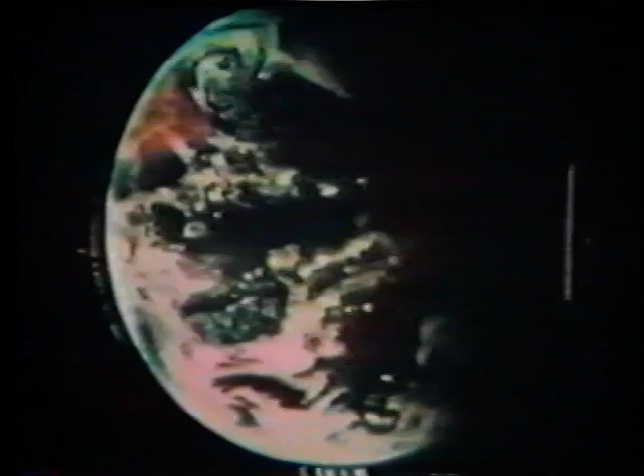Except for scientists who study it or environmentalists concerned about its quality, most people give little thought to the air which surrounds them. But if you're counting on it supporting you immediately after rotation from the runway, you should reacquaint yourself with it. Almost everyone remembers that dry air is 78% nitrogen, 21% oxygen, and 1% other gases. The ratio of these gases remain the same around the world and as high as the atmosphere extends.

Water vapor is also a gas found in the atmosphere. Its quantity may vary, unlike the other gases whose ratio is pretty well constant. It may make up from near 0% of the atmosphere to a maximum of about 5%. As the amount of water vapor increases at a given point, all other gases are reduced proportionately. When water vapor is absorbed by the atmosphere, it reduces the molecular weight of the air. It makes the air thinner, so to speak, because a molecule of water vapor is actually lighter than a molecule of air. It seldom affects aircraft operation by itself.

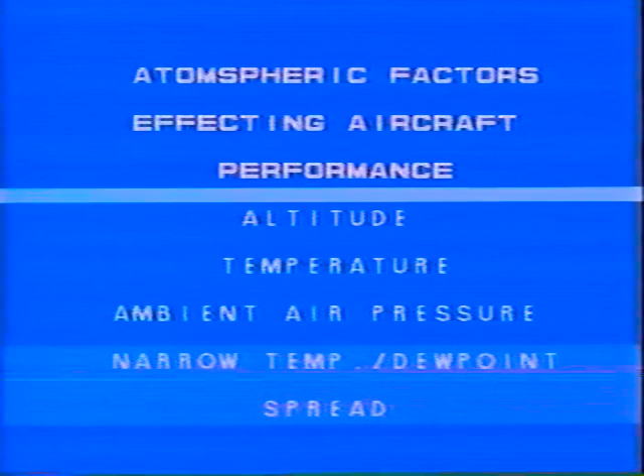Most of us probably know that air is a gas and as such has all the properties of gases. It has mass and weight. It can exert pressure, be compressed or diffused, causing changes in its density. And it can flow as a liquid. It offers resistance to objects moving through it. All of these properties are at work when you fly your plane through the atmosphere.

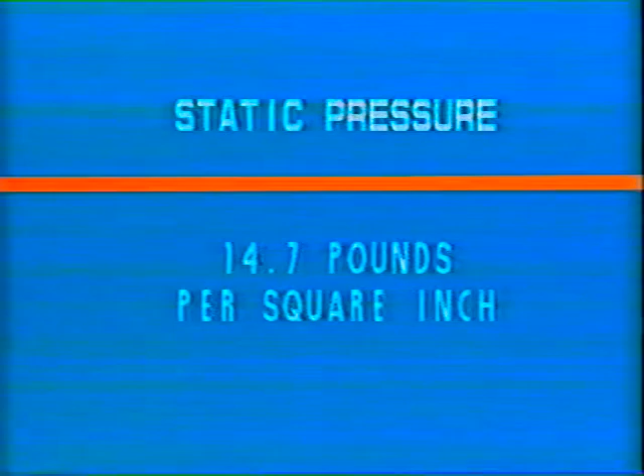Let's first look at the words static pressure. Remember the 14.7 pounds per square inch you learned in junior high school science? That was supposed to be the normal air pressure, that is static pressure. You probably remember a specific number without any qualifications. However, the figure is an arbitrary one and only pertains to sea level on a, quote, standard day, unquote.

If you went to school in North Platte, Nebraska, the figure that you learned as normal air pressure was about 1.5 pounds per square inch off. Air pressure on a standard day in North Platte is more like 13.2 pounds per square inch.

Static pressure, then, is the force exerted by the weight of the atmosphere pressing down from hundreds of miles in space. It is pressing down because it has mass and is reacting to the pull of gravity. If that is so, why isn't the pressure equal regardless of the altitude? Why does North Platte, at a little over 2,800 feet, have over a pound of pressure less than at sea level? One of the other properties of air helps us to explain it.

Compressibility was mentioned earlier. The more weight exerted upon a gas, the more dense it becomes. A column of air one foot square, extending out to the limit of the atmosphere, weighs a little over a ton at sea level on a standard day. For each minute measurement upward, away from the Earth, there is less weight pressing down. This means that the atmosphere at that point is a little less dense.

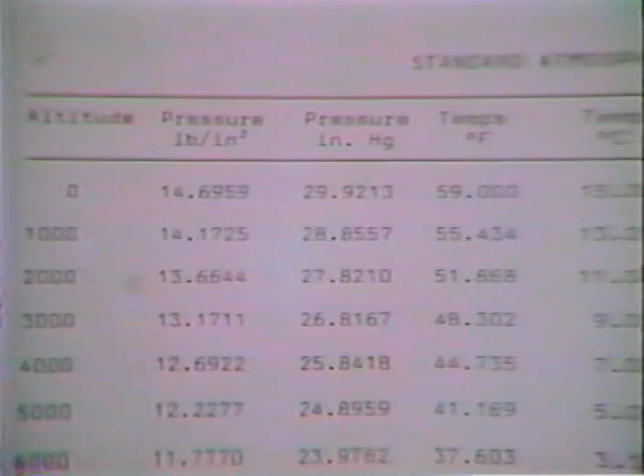Let's take a look at a chart which represents a standard day, one of those we mentioned earlier. This illustration is an excerpt and not the complete chart, which was originally put together by the National Advisory Committee for Aeronautics, the predecessor to NASA. The chart is based on many years of weather observations, and since it was published, has been confirmed as basically accurate. Its purpose is to provide a common denominator for the measurement of aircraft performance and to provide a standard upon which to calibrate and correct the readings of some aircraft instruments. The chart will be important when we discuss aircraft performance and in other presentations dealing with instruments.

Before dealing specifically with any one of them, let's take a moment to review the four forces acting on an airplane in flight. You know them as thrust, drag, lift, and weight, or gravity as some prefer to call it. The two forces which are constantly trying to bring you to a stop on the ground are drag and gravity. The two forces which you must produce to overcome these negative forces are thrust and lift.

Thrust must be able to overcome drag, and lift must be able to overcome gravity before the plane can get off the ground. In a stabilized flight condition, such as level flight, climb, or descent at a constant velocity, thrust and drag are equal, and lift and weight are equal. The propeller is producing a given thrust, but the total drag equals that thrust and limits the speed of the aircraft. The weight of the plane, plus a little extra aerodynamic weight, is equaled by the lift produced over the wings. In aerodynamics, this stable condition is known as equilibrium.

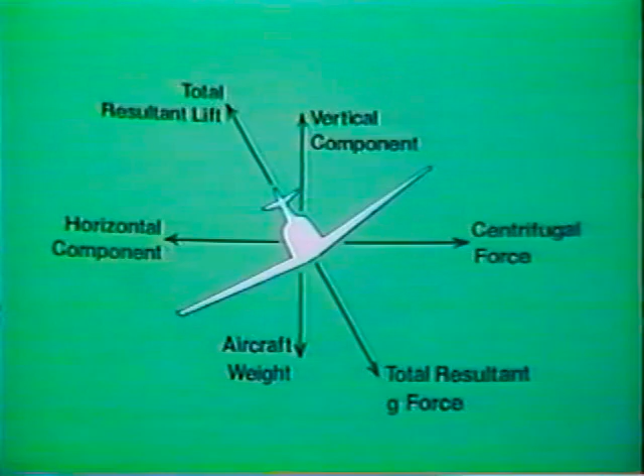Now we come to the big question. What is lift, and how is it produced? Before we get the answer, let's look at some pictures and review some more terms.

An airfoil is any part of the plane shaped so that it responds to air movement by producing differential pressure on either side of the airfoil. The wing, propeller, and empennage are the important airfoils.

Leading and trailing edges of the wings seem to be pretty obvious, but they do more than just outline the silhouette of a wing. Their location has much to do with the aerodynamics of an airfoil. A line connecting the leading and trailing edges of an airfoil is referred to as the chord line.

It should not be thought of as being a permanently anchored thing, since it moves as the high-lift devices change the shape of the wings. Its position in relation to the relative wind and the longitudinal axis of the aircraft are extremely important.

Camber means curving or bending. On an airplane, it refers to the curving surfaces. A wing which has identical curvature top and bottom is known as a symmetrical wing. An asymmetrical wing usually has a flatter lower surface with more curvature on top.

Relative wind is the airstream created by the movement of the plane through the air. Most of the time, its direction is opposite the flight path of the aircraft, but it may be deflected by gustiness or wind shear. Angle of attack is the angle between the relative wind and the chord line of an airfoil. Increasing the angle of attack will increase lift and also drag.

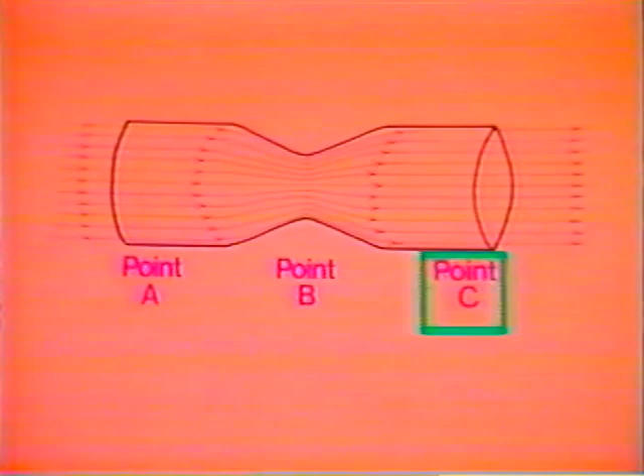After the airflow passes the restriction at point B, its velocity decreases and the pressure increases. If the velocity at point A and C are the same, then the pressure would be identical.

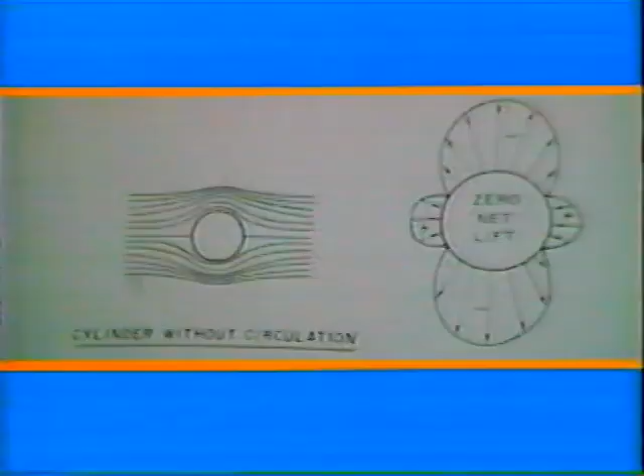Another important concept in the generation of lift is circulation. If you are a baseball fan, you probably have seen its effect on a pitched fastball. Look at this diagram of a cylinder and an airflow. We will ignore density and viscosity at this point.

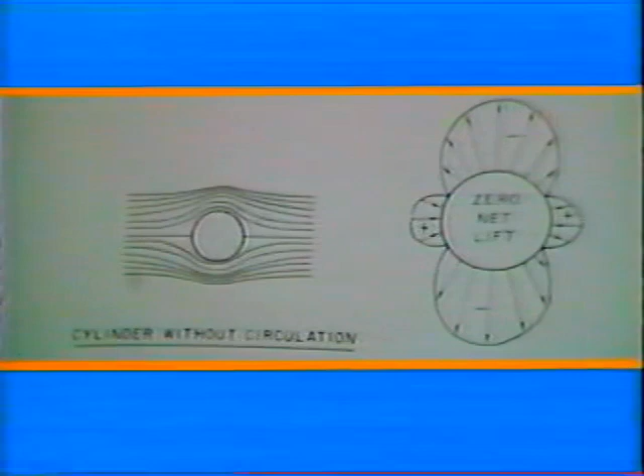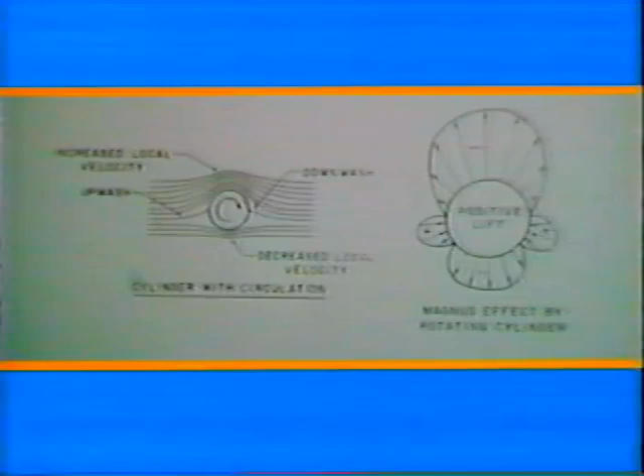Note the pattern first where the cylinder is stationary, and in the second illustration where the cylinder is rotating. The circulation of the cylinder has produced not only a larger amount of lift on its top side, but it has also produced an upwash ahead of the cylinder and has moved the stagnation points toward the bottom.

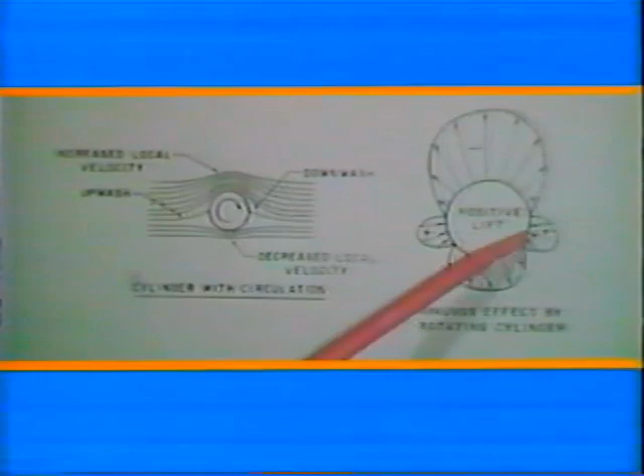There are normally two stagnation points on an airfoil. They occur along the leading and trailing edges of an object placed into an airstream.

At the leading edge, where the air separates to go either above or below, a small area exists where there is no air movement. At this point, a stagnation pressure develops.

This is the sum of the ambient pressure ahead of the wing and the dynamic pressure around the wing. A similar area occurs along the trailing edge of the airfoil.

Apply this concept to baseball. The pitcher puts some backspin on the ball as he throws. The highest velocity exists over the top of the ball, creating lower pressure there than on the bottom.

This lifts the ball. It actually bobs up from the plane in which it was thrown. And if it's a good fastball, the batter will undercut it completely.

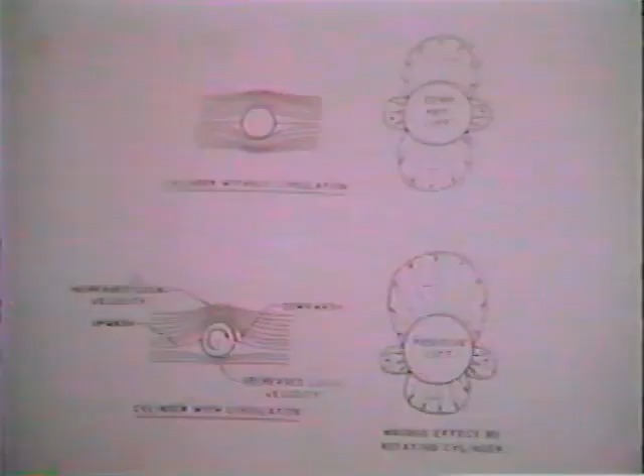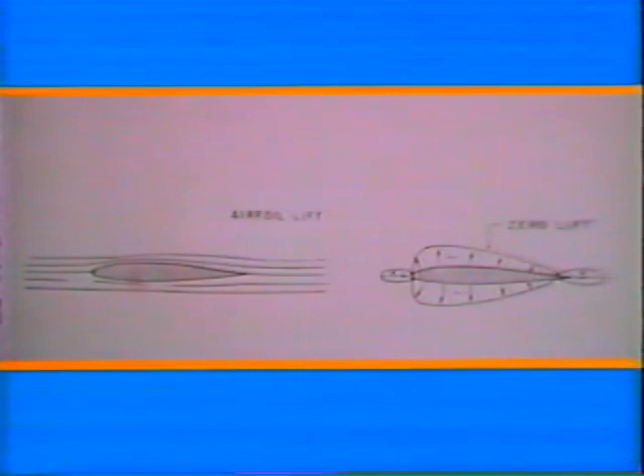Back to airplanes. Compare the cylinder diagrams with two diagrams of a symmetrical airfoil. Note how similar the illustration of the airfoil at zero angle of attack is with the non-rotating cylinder. There are stagnation points fore and aft, and reduced pressure is equal top and bottom.

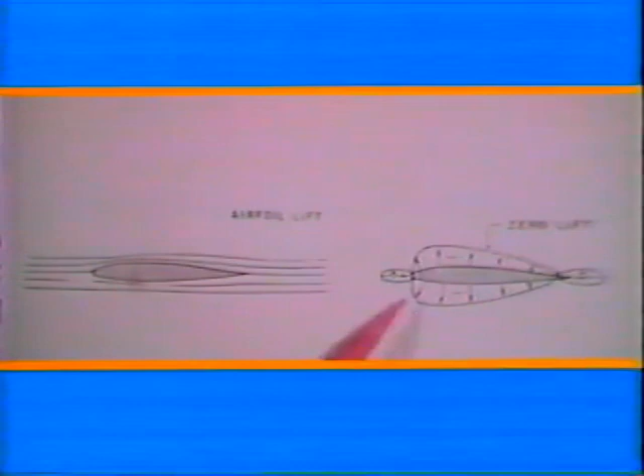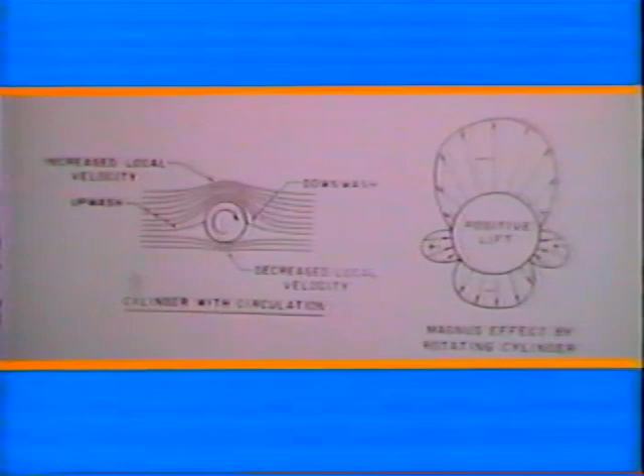Now look at the diagram where the cylinder has been placed in rotation. Lift forces on the top, where velocity is greatest, has increased, while the opposite is true on the bottom. The stagnation points have moved to a lower position. The net result is a positive force acting perpendicular and upward from the cylinder.

The position of stagnation points is of additional importance to you. It is the leading edge stagnation point that has the area where ice formations start. Because of the stagnant air at this point, the ice sometimes develops almost a horn shape, which continues to build out beyond the stagnation area under some circumstances.

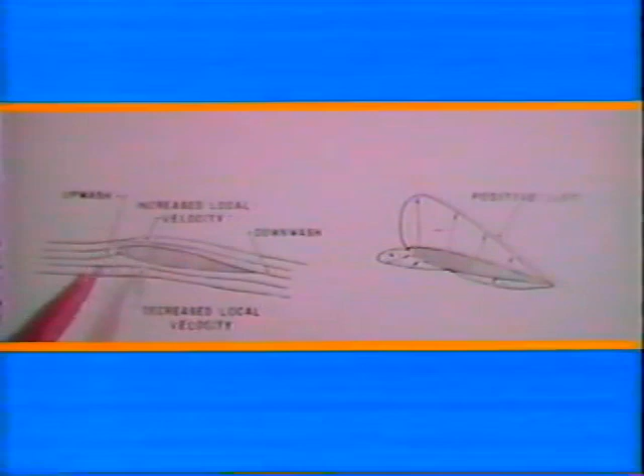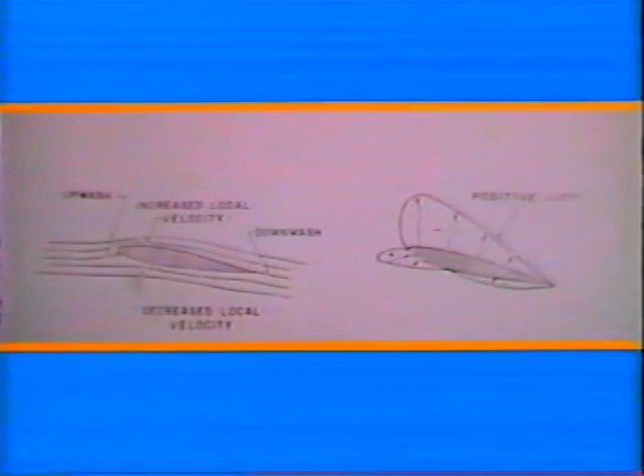The symmetrical airfoil, tilted to a positive angle of attack, shows very similar pressure patterns. Note also the upwash ahead of the airfoil and the downwash behind the trailing edge. The airfoil appears to have the same circulation around it as does the circulating cylinder. This helps explain why velocity of the airstream over the wing accelerates as the wing is placed in motion. It is subject to the same type of circulation.

One more observation deserves our consideration. The symmetrical airfoil at small angles of attack may develop negative air pressure both top and bottom. It will be true, however, that the least pressure will still be on the top of the wing. It is also true that at high angles of attack, the pressure on the lower surface will be increased.

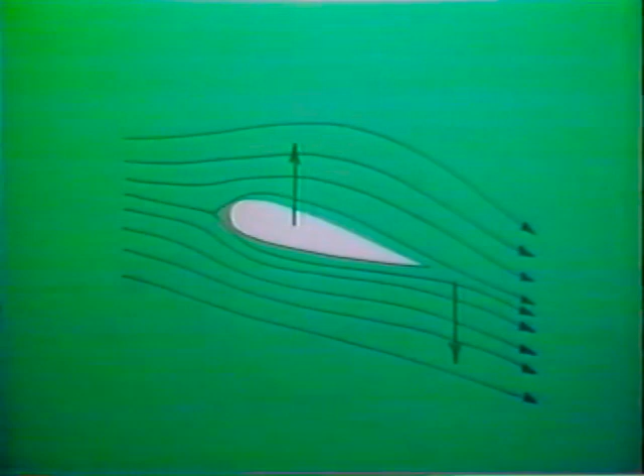It will force large quantities of air down in the downwash coming from the airflow over the top of the wing. In this situation, up to one-third of the lift force may come from the increase in pressure.

So far, I've presented you with three important concepts on the production of lift. First, the Bernoulli principle utilizes the theory of conservation of energy, and it explains why air placed in motion over an airfoil reduces the pressure.

Second, the theory of circulation helps us to understand why the velocity of air flowing over the wing is greater than that flowing beneath the wing. Third is Newton's third law, which states that there must be a reaction for every action. We know that large quantities of air are forced downward behind the trailing edge of the wing. If we force air downward, the reaction in nature is to force the wing up.

Now that we know why lift is produced over the wing, let's take a look at how engineers determine the amount of force produced by this phenomena. It will involve a mathematical equation, but not one that you should find very intimidating. The formula for lift looks like this: Lift equals the coefficient of lift times one-half of the density times the velocity squared times the wing surface area.

All of the items seem obvious except coefficient of lift. This item is an index number representing the ratio between lift pressure and dynamic pressure. It is related to the shape of the wing and the angle of attack. The maximum lift coefficient for any wing occurs at the point of the stall.

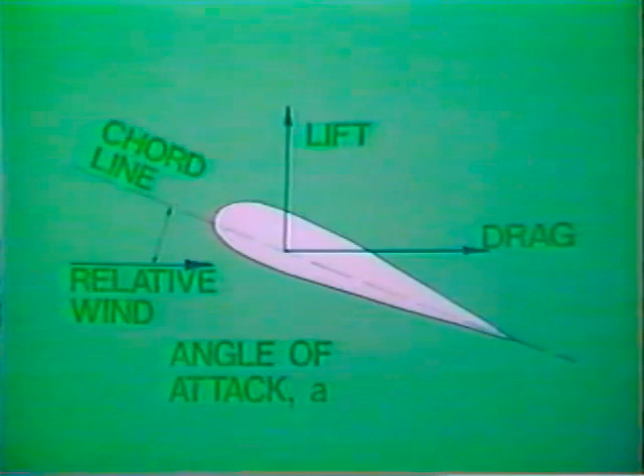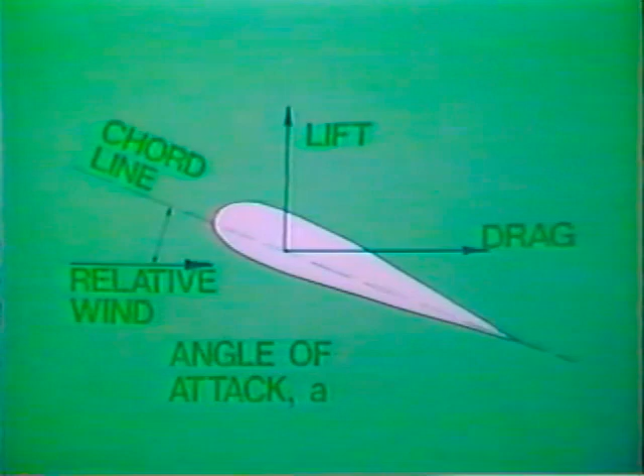We know that a wing will always stall at the same angle of attack. We therefore reach the maximum coefficient and the stall angle of attack at the same time. This has implications for landings and takeoffs.

For illustrative purposes, let's place two aircraft on a runway side by side. All factors are equal except the maximum coefficient of lift. Airplane A has a maximum coefficient of lift of 1.8 with a thick asymmetrical wing, while B has a thin symmetrical wing with a coefficient of 1.0. Which plane will use less runway for its landing and takeoff? It will be the aircraft with the highest maximum coefficient of lift, or in this case, aircraft A.

Now, would it be possible to modify airplane B without changing to another airfoil and be able to equal the landing and takeoff performance of airplane A? Yes, it would. We could cut loose a section of the wing at the trailing edge and hinge it so it would kind of droop down. Why don't we call it a flap?

Since shape is considered in our index, we bend the flap down until we get a camber which will be equal to 1.8 as its maximum coefficient of lift at the maximum angle of attack. Now, we can use the same landing and takeoff figures for both aircraft.

We can retract the flaps while in cruise and have the benefit of a cleaner airfoil with less drag. The lowered coefficient of lift will be compensated for by increased speed.

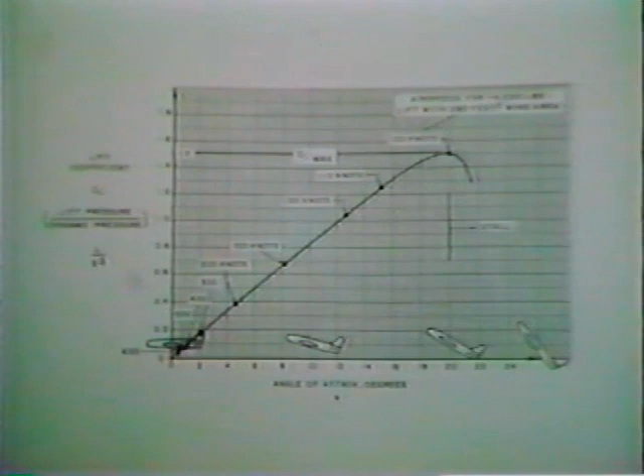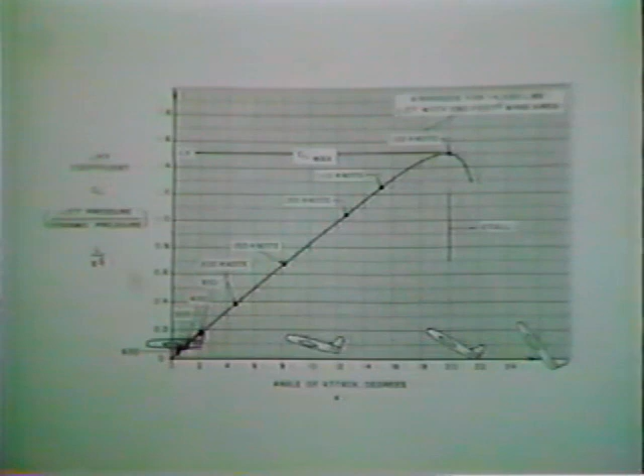This chart was taken from Aerodynamics for Naval Aviators. It shows that the coefficient of lift varies directly with the angle of attack. How is it possible that a diminishing angle of attack and a lower coefficient of lift can keep an aircraft in the air? The answer is your airspeed.

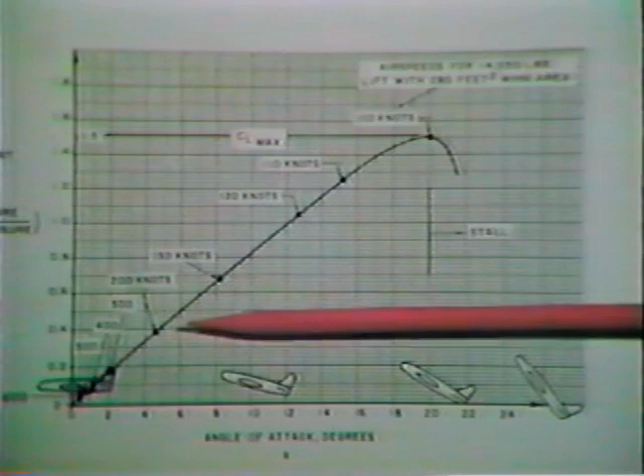Note on the diagonal line, which correlates index numbers and angle of attack, that selected airspeeds are also given. You will find that as the angle of attack and the coefficient of lift diminish, the airspeed increases. Many instructors use this information to demonstrate that control of airspeed is primarily a function of angle of attack.

They further claim that power is used to control altitude. Although discussions on this topic have appeared in the journals from time to time, it is well accepted that attitude controls airspeed and power controls altitude.

Well, we ought to regroup here for a moment. We have just determined that there are basically three things which determine how much lift you will get over your wings. They are relative wind, angle of attack, and camber. They are interrelated so that what affects one has an effect on another.

For example, let's take a plane in straight and level flight. If we retarded the throttle and began to lose altitude, you would automatically adjust the angle of attack if you wish to remain in level flight. This would reduce your airspeed, but by increasing the angle of attack, you have increased the coefficient of lift, which gave you the lifting force you need to remain at a given altitude.

There have been many pilots who have lost airplanes because they didn't understand this relationship. Take the full flap go-around as an example. Cleaning up flaps means reducing the coefficient of lift to that of a clean wing. Getting rid of flaps all at once without giving the plane a chance to accelerate and compensate for this loss may mean a stall and most certainly the loss of altitude at a crucial point.

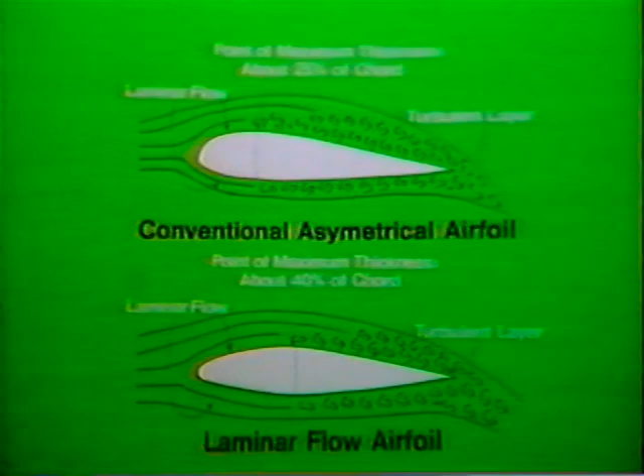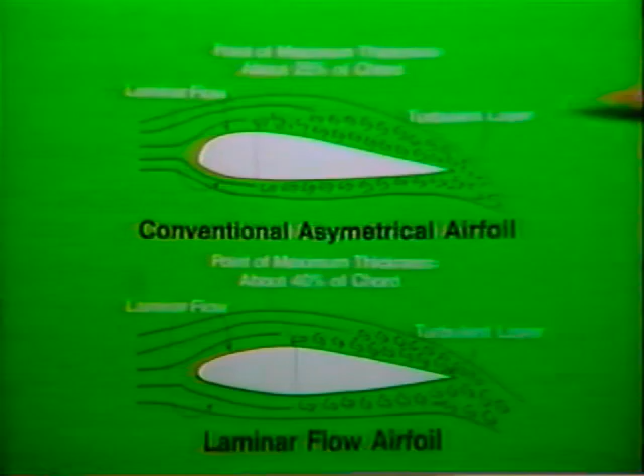Somewhere behind the point of maximum thickness of the camber, the airstream cannot hold to its smooth boundary layer. It becomes turbulent. As long as it has a strong enough velocity, it will remain layered. Stagnation pressure from the trailing edge of the wing is quite powerful. The velocity of the turbulent layer diminishes as it nears the trailing edge, and the airflow along the wing may actually reverse direction due to the trailing edge stagnation pressure.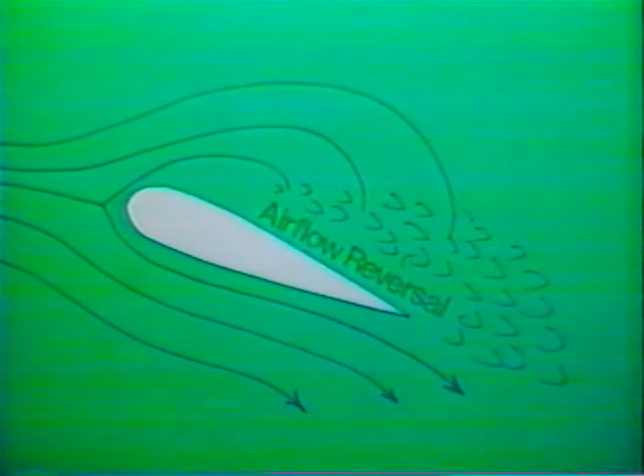What would cause the turbulent layer to lose velocity? When the angle of attack is increased, it becomes more difficult for the boundary layer to cling. The circulation effect produces an upwash at too great an angle over the leading edge. This allows the turbulence layer to spread toward the leading edge. Because it is turbulent, its velocity is decreased, and the trailing edge stagnation pressure amplifies the airflow separation.

At the stall angle of attack, this separation is complete. All you have left to keep you in the air is the downward deflection of the air from the bottom of the wing.

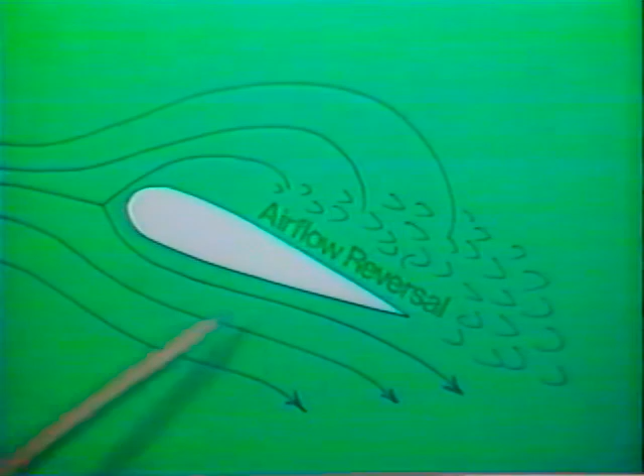Unfortunately, some training manuals leave you with just the images of the wing sections and their airflow patterns. Well, a wing just doesn't behave that way most of the time.

First, it is designed so that its stall pattern follows a known progression. A well-designed wing will stall first at the trailing edge near the wing root. Except for the T-tail aircraft, this places the tail surfaces in turbulent downwash, which produces the buffeting that is your warning of an impending stall. It also leaves the tips to stall last, which gives some degree of aileron control up to complete stall. It also helps prevent the plane from developing some nasty wing drops during the stall, which could happen if the tips stalled first. Some of your wing may still be flying when the stall breaks.

The reason the nose falls through the horizon with suddenness is that there is a complete stall close to the fuselage, which eliminates the downwash over the horizontal stabilizer. Your plane depends on that downforce to balance a nose-down pitch built into it at the factory. With the tail force gone, the pitch force takes over and drops the nose.

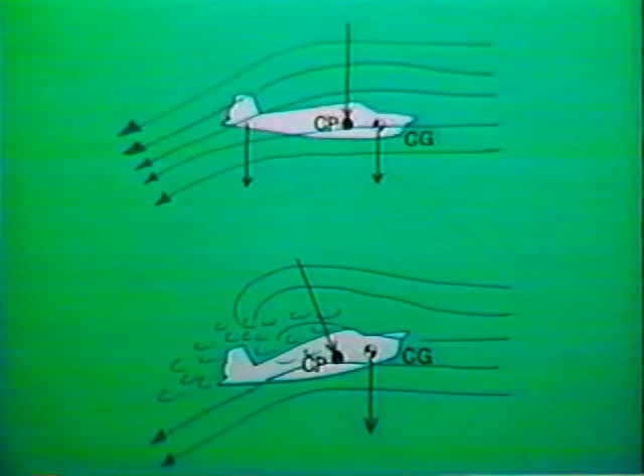By stalling the wing root area first and having the stall progress outward from the fuselage, the pilot is given a warning of an impending stall. The nose will automatically pitch downward toward recovery, and aileron control will exist well into the stall, but not after a complete stall.

The way that designers get the wing root to stall first is usually to twist the wing by giving it a smaller angle of incidence at the tip than it has at the root. It is only a matter of a couple degrees, but it does the job.

It is also possible that the airfoil near the tip is of a different shape than the airfoil in the main wing section. If the coefficient of lift is higher at the tips, it will mean that the tips will remain flying after the main wing has stalled.

Another technique in inducing root stall first is to place a small triangular strip on the leading edge near the wing root. At high angles of attack, these strips disrupt the smooth airflow over the wing enough to induce early airflow separation and will initiate the stall at that point.

A point worth repeating concerning stalls is that they can occur in any aircraft attitude and at any airspeed. A snap roll at the top of a loop when the plane is inverted is a stall maneuver. High-altitude aircraft cruising just under Mach 1 have stalled in clear air turbulence and have fallen thousands of feet before recovery.

The angle of attack at which a given airplane will stall is always the same. Your stall warning device is set to trigger at a few degrees below the stall angle of attack. Remember that the next time you make a tight turn from base onto final, believing that just a little extra airspeed will compensate for the higher angle of attack needed to support the airplane.

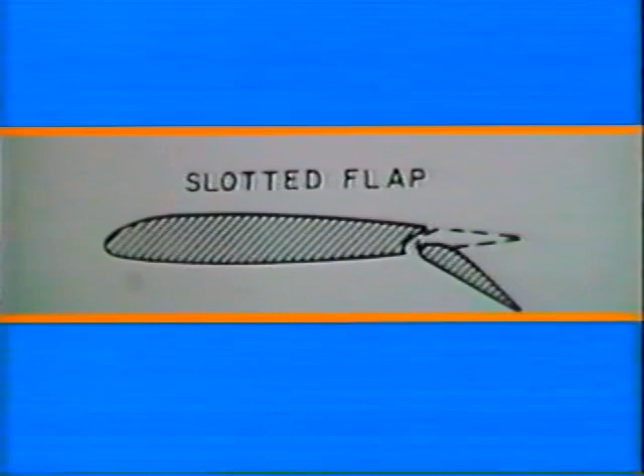The slotted flap is related to the plain flap. The difference is that the flap is pushed back away from the wing as it comes down. This allows high-energy air from below the wing to be ducted over the flap. The renewed airstream gives the boundary layer the velocity needed to delay airflow separation longer, which increases the coefficient of lift even more. A close look at a Cessna high-wing airplane will give you a good picture of this type of flap.

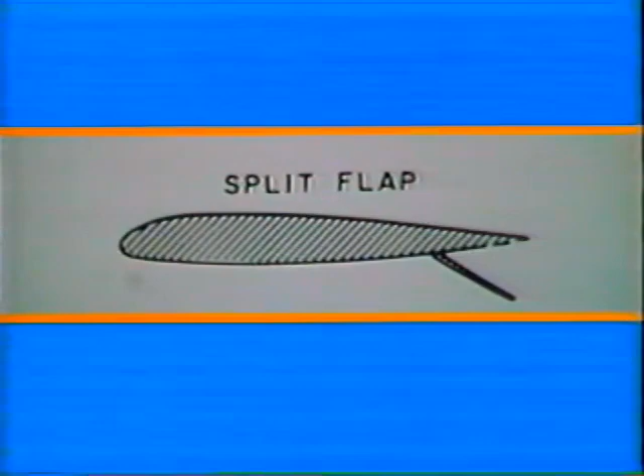The flap used on the Gooney Bird, the legendary DC-3, is called a split flap. In this type, just the lower surface of the wing droops down instead of the entire trailing edge section. Its coefficient of lift is slightly better than the plain flap, but it produces great quantities of drag.

The Fowler flap not only droops to change the camber, it also uses a portion of the undersurface of the wing to increase wing area by sliding it aft as it is lowered. The total wing surface is one of the prime factors in the lift formula. A flap which can increase the coefficient of lift and at the same time increase wing area will add greatly to the lifting force. That is what the Fowler flap does.

However, it needs a complicated mechanism and some pretty heavy hardware, which makes it expensive to install on the average general aviation airplane.

High-performance aircraft will often include lifting devices on the leading edges as well as the trailing edges. Here's why. Earlier, we discussed how the boundary layer converted to a turbulence layer slightly aft of the point of maximum wing thickness. With flaps down, the turbulence layer tends to separate from the surface more readily.

The boundary layer needs a dynamic shot in the arm, and that is provided by opening a contoured slot along the leading edge of the wing, which allows the boundary layer to pick up enough momentum to delay the onset of the turbulence layer, which improves the coefficient of lift.

The movable slat is the most common leading edge high lift device. It is either automatically operated by the airflow or operated manually by the pilot. In addition to allowing for a smoother airflow over the wings, these leading edge slats or flaps also change the camber of the wing and improve the coefficient of lift.

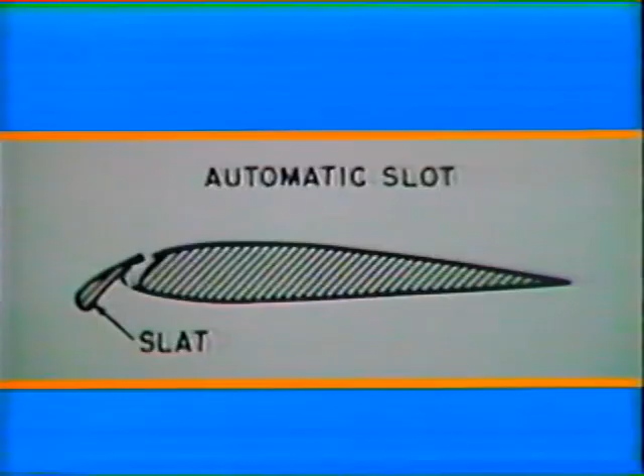It was the automatic retraction of the leading edge flap on the left wing of the DC-10 in Chicago which caused the wing to stall, rolling the aircraft out of control.

Experimentation continues with devices designed to control the boundary layer for the full width of the wing. The engineers have been quite successful with boundary layer control, but have yet to figure how to eliminate the miles of plumbing necessary to make it work.

The two major systems either bleed air from the surface through hundreds of tiny holes connected to a suction pump, or force air through the holes from the compressor section of the gas turbine engine. Either way provides the aircraft with a new, higher stalling angle of attack. Although results have been good, the cost-benefit ratios have not yet been positive enough to put it into production models.

We have now scratched the surface of aerodynamics by helping you understand perhaps a little better the concept we call lift. We know it is a direct product of properties and conditions which prevail in the atmosphere. Static and dynamic pressure, density and viscosity of the air around us determine conditions for the production of lift.

We have dissected a cross-section of the wing and named its parts: leading and trailing edges and chord line. We have defined and differentiated between angle of incidence and angle of attack. We discovered how a wing produces lift by examining the theories of Bernoulli, dealing with the conservation of energy, of Newton, dealing with action and reaction, and the theory of circulation, explaining increased velocity over the wing.

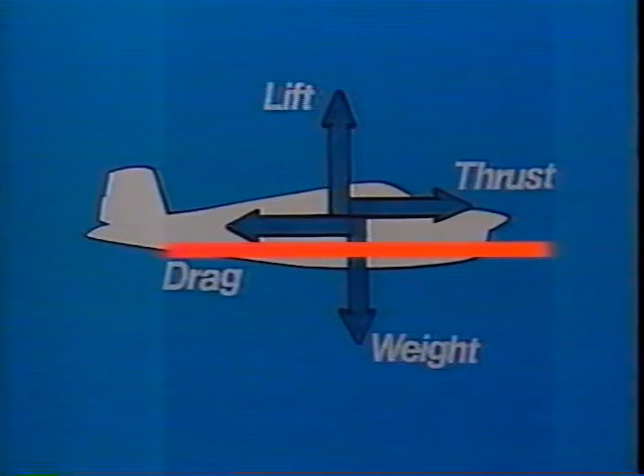Now, we all know drag opposes thrust. It goes to work as soon as the air starts to move past the airframe. It's always with us as we fly, and we even make good use of it at times. As pilots, we can't do anything about most of it, but we do have some control over one type.

Most of us learned that there are two types of drag: parasite drag and induced drag. You buy parasite drag with the airplane. Its design and general condition will determine how much there will be.

Induced drag is a product of lift, and this is where you can exert the most control. I will take up parasite drag with you first, and we will see what we can do to keep it to a minimum. It has several subdivisions, which we will look at one at a time: form, skin friction, interference, separation, pressure field, power plant, and wing section profile.

Form or flat plate drag is sometimes referred to as the barn door effect. It is created by the total frontal area of the plane and includes not only the fuselage, but gear, struts, wires, and antenna as well. Many ultralights have large quantities of form drag, part of which is the human body hanging below the wings.

Skin friction drag is created by the rubbing of the air molecules against the total exposed surface of the plane. It is directly proportional to the amount of surface and the roughness of the surface. Many home-built planes made of composite materials can be rubbed to a super smooth finish, thereby eliminating a good chunk of skin friction drag.

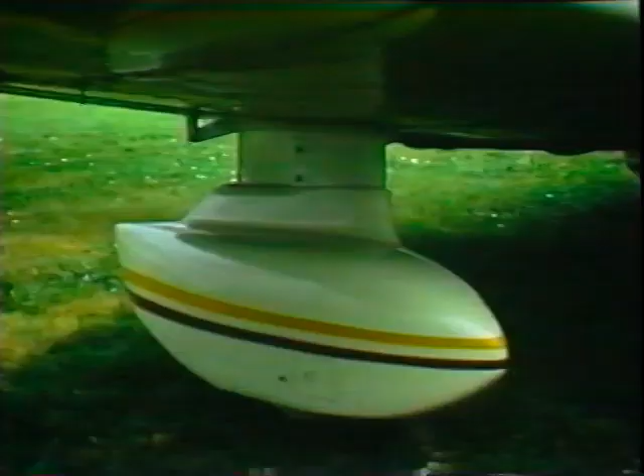There is a tendency for the airflow to break down and separate wherever an appendage meets the fuselage. This creates what engineers call interference drag. Some of this type of drag can be eliminated by placing streamlined fairings around the point where the wings, landing gear, struts, and so on meet the fuselage.

Separation drag is similar to interference drag in that it is the result of design problems. It may occur wherever there is an abrupt contour change in the fuselage shape. The switch from the straight razorback fuselage to bubble canopy on some World War II fighters, such as the Spitfire, P-47, and P-51, caused a breakdown over and around the tail surfaces, necessitating the addition of a dorsal fin ahead of the regular vertical fin. While the dorsal fin did not totally compensate for drag, it did restore directional stability.

Whistling doors are a clue to the fact that you may have what could be referred to as pressure field drag. It occurs around leaky doors, cowlings, and all control surfaces. You can install new door seals and tighten up cowlings, but the leakage around the control surface is a design problem that modification or redesigning may take care of.

Power plant drag consists of the energy used in cooling the cylinders, providing ram air to the carburetor, and driving accessories. Cowl flaps allow for adequate cooling during ground operation and high horsepower maneuvers, but are closed in cruise to eliminate some of the power plant drag.

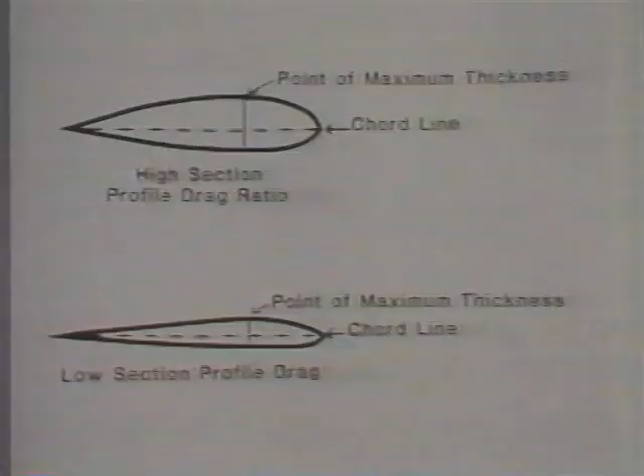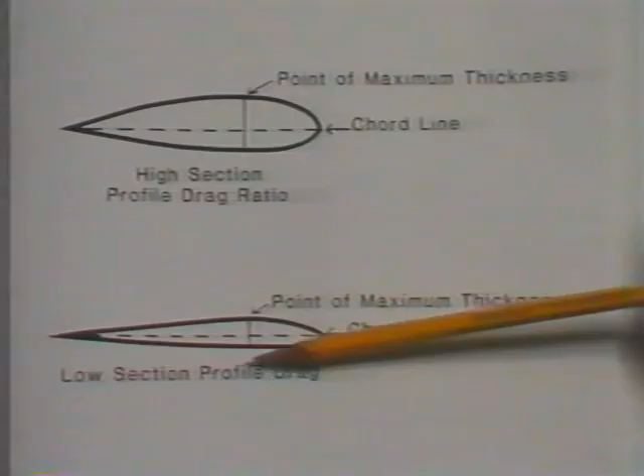In selecting the airfoils which will be used on a particular aircraft, the engineers must be concerned with wing section profile drag. Section profile means that the airfoil shapes taken from cross-sections of the wing at various stations are being considered. The designer must consider such things as the ratio of maximum thickness to chord, at what point along the chord the maximum thickness will occur, and what kind of curves will be used. This information is important not only in determining the coefficient of lift, but also the section profile drag.

The ideal airfoil section would have a high coefficient of lift with a low profile section drag. Since this is an impossible design to come up with, every section airfoil is a compromise. It's further compromised by other considerations such as the thickness of the main spar and whether flaps or ailerons will be part of that airfoil. In summary, wing section profile drag is extremely important to the aircraft designer in establishing the efficiency of the wing for a particular aircraft.

Total drag consists of all these parasite drags plus induced drag. Your control over parasite drag consists mainly of keeping your plane clean and waxed and sealed up tight. You do have some control over induced drag, so let's talk about that.

Placing a wing in motion produces both lift and induced drag. It's like having a date with Siamese twins. If you take one, you have to take the other, regardless of how ugly the other one might be. We look at lift as being the desired twin and drag the ugly one. I'm sure you've heard an unpleasant date partner described as a drag, but we know one must look deeper than the epidermis to discover all the qualities of a person.

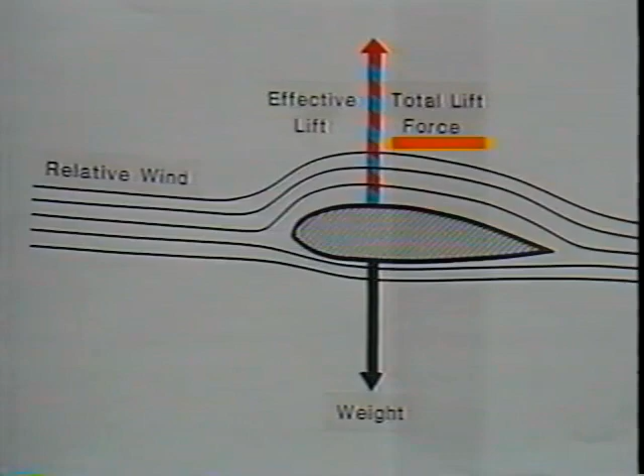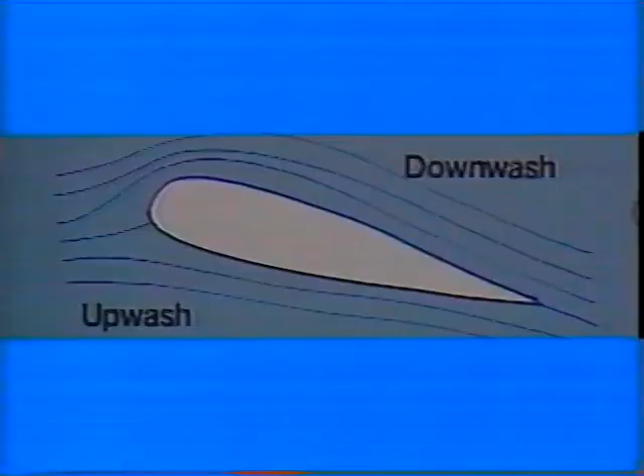Before we go to diagram 2, a word about average relative wind. In basic aerodynamics, you learn that wind is always opposite and parallel to the path of the plane. This is true of the main airframe, but not always true of the wings. A moment ago, I mentioned the circulation theory and pointed out how air sweeps up ahead of the wing and produces a downwash behind it. The circulation of air creates a slightly different relative wind for the wings, which is usually inclined upward from the path of the plane. As the angle of attack increases, so does this average relative wind.

You have been told that your plane will always stall at the same angle of attack. As you demonstrate a stall on your next biennial flight review, observe the angle made between your wing chord line and the horizon. You know your wing is supposed to stall at maybe 18 degrees, but you are observing 30 degrees. This is because the wing's average relative wind is at a much higher angle than the relative wind for the plane as a whole.

In diagram 2, I have introduced a small angle of attack.

Note that the average relative wind is also slightly inclined to horizontal. We are still in level flight, so the weight and effective lift are equal and opposite. However, the total lifting force of the wing acts at 90 degrees to the average relative wind.

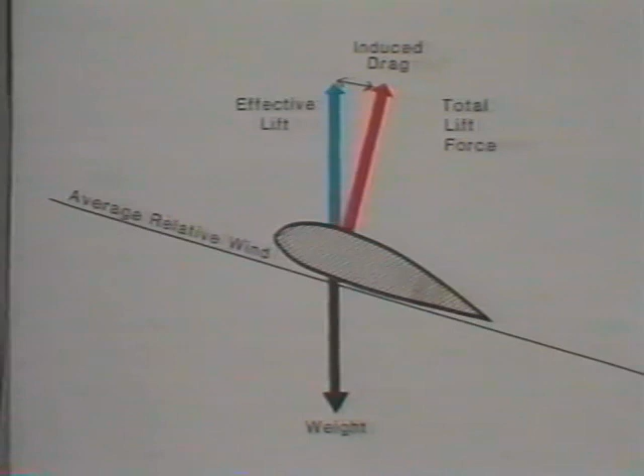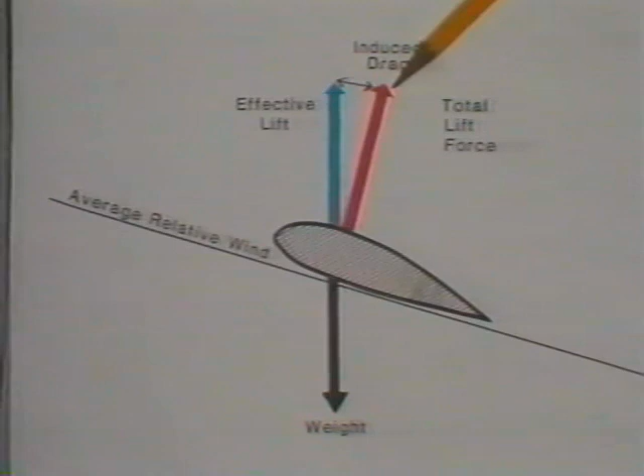It is now inclined aft and has become greater than the effective lift. The significance of this is that some of the total lift force is now acting toward the rear. It is opposing thrust, so must be classified as drag, induced drag to be specific. How much induced drag is being produced in this instance? We can find that by measuring the distance between the tips of the red and blue arrows.

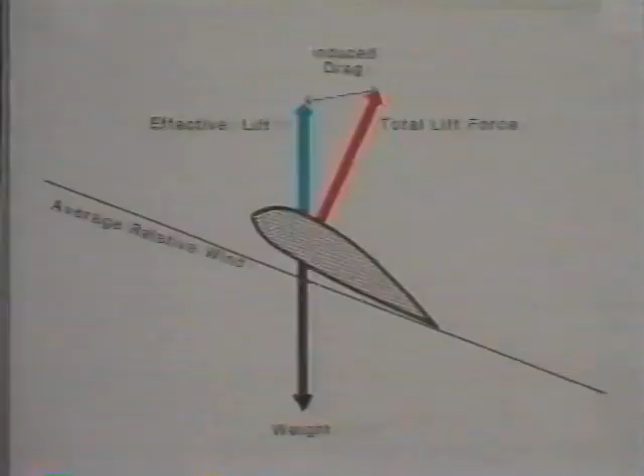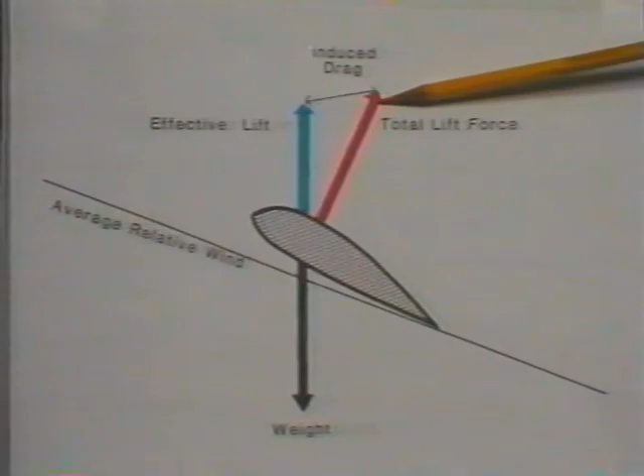In diagram 3, we have further increased the angle of attack and the average relative wind. Note that the total lift force is at a much larger angle to the effective lift vector and is longer. This situation produces more space between the arrow tips, indicating greater induced drag. Although it may not be completely obvious from our diagrams, the conclusion is that induced drag not only increases with an increased angle of attack, but it also increases at a greater rate than the angle of attack.

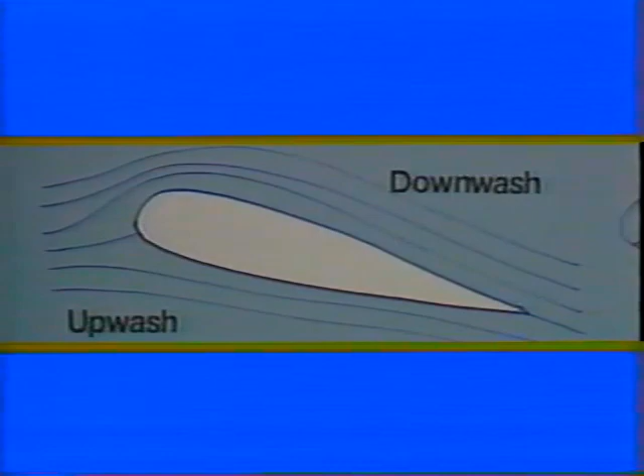We're not through with induced drag just yet. So far, we have dealt only with idealized cross-sectional diagrams of wings. If we put the whole wing together, we will see that the dynamic air does not seem to follow as simplistic a path as in the previous diagrams.

The air currents flowing over the wing will take a diagonal path leading toward the fuselage. The currents under the wing will move diagonally toward the tips. Why is this so? It is the nature of liquids and gases to try to fill in any weak spots or holes. We know that the area over the top of the wing has something less than the ambient air pressure. We also know that the air pressure beneath the wing is a bit greater than ambient air pressure, and the higher pressure will try to fill in the area of the lower pressure.

Since the wing blocks the passage except for the tips, there is a movement along the bottom of the wing toward the tip. Once there, the air spills up and over, creating a vortex which trails behind and below the tip of the wing. The curling of the air currents over the wing at the tips produces a force which causes the air to be deflected toward the wing roots on the upper surface of the wing.

All wings presently flying have tips which produce some amount of vortex. In a vortex, the downwash is greater than the upwash. This situation creates a higher induced angle of attack, which in turn creates higher induced drag. The heavier an aircraft becomes, the slower it flies, the greater the vortex becomes. This means that induced drag is greatest as your plane approaches its level flight stall speed.

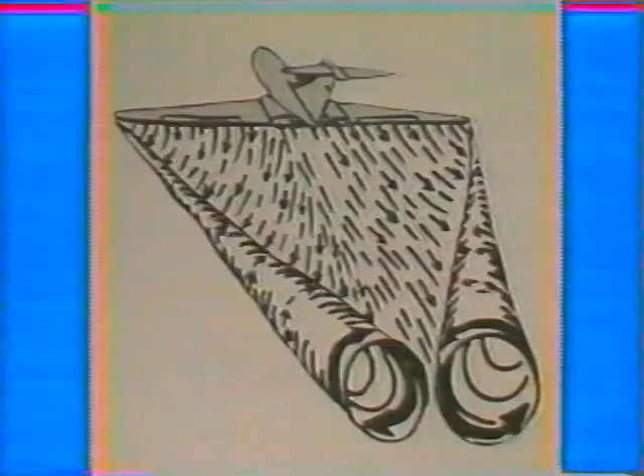From your first lesson to your last approach, you have been continually warned to be alert for wake turbulence. Right now, you can probably visualize those twin tornadoes trailing from the tips of a 747. They will drop 800 or 900 feet, level off, and begin to spread apart.

Perhaps you have been warned about the big planes so much that you aren't prone to visualize these same tornadoes streaming from a King Air, a C-130, or a Cessna 210. Wake turbulence is generated by all winged aircraft in flight, including helicopters. A good rule to follow is, big and slow, don't fly below.

The most successful attempt to reduce vortices and induced drag is the winglet. It was developed originally by NASA and has been utilized by several manufacturers. The effect of a winglet is like an extension to the wing, which increases the aspect ratio. A higher aspect ratio diminishes the vortices but does not eliminate them. A diminished vortex results in diminished induced drag.

If a designer can reduce the tip vortex, he would lower the wing's average angle of attack, thereby reducing induced drag. There is a way to do this. It lies within the ratio of the wingspan and its chord and is called the aspect ratio. The aspect ratio for a rectangular wing, similar to the ones on many general aviation aircraft, is found by dividing the wingspan by the average chord. A high number would indicate a long, narrow wing, such as those used on high-performance sailplanes.

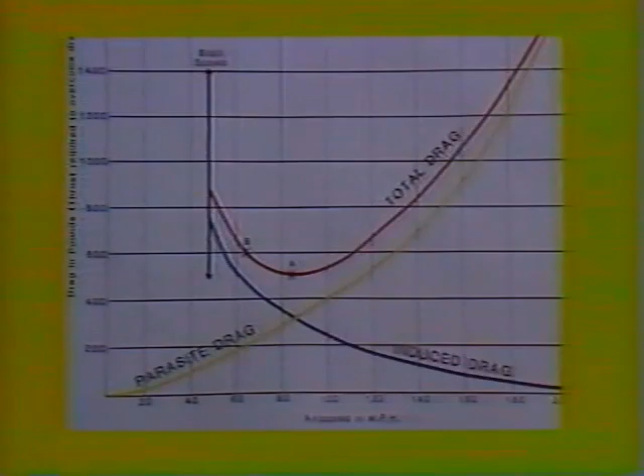The maximum lift-to-drag ratio for a given aircraft is established at a fixed angle of attack. On your airplane, the maximum range would occur if you always flew it at the same angle of attack regardless of weight. However, weight will vary, so something must give, and that is airspeed.

For maximum range, you would maintain an angle of attack and decrease airspeed as fuel burned off and lightened the aircraft. If you were flying a single-engine aircraft 10,000 feet above the surface and had a power failure, how far would you be able to glide before landing?

The answer lies with the angle of attack, which will produce the highest lift-to-drag number. For a hypothetical airplane, a given angle of attack could produce a lift-to-drag number of 10. This is a glide ratio of 10 to 1. You could glide almost 20 miles from that altitude, provided you maintain proper angle of attack.

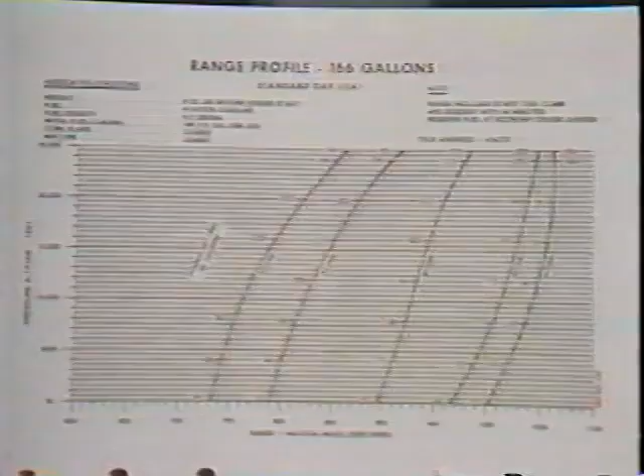Your airspeed would depend upon the weight of the plane. The trouble with this idea is that we don't have a good, inexpensive angle of attack indicator. You don't ever know what the angle of attack is at a given time. The best substitute is a chart giving the lift-to-drag numbers at various airspeeds and weights. Most aircraft operating manuals will give range charts or graphs in the performance section.

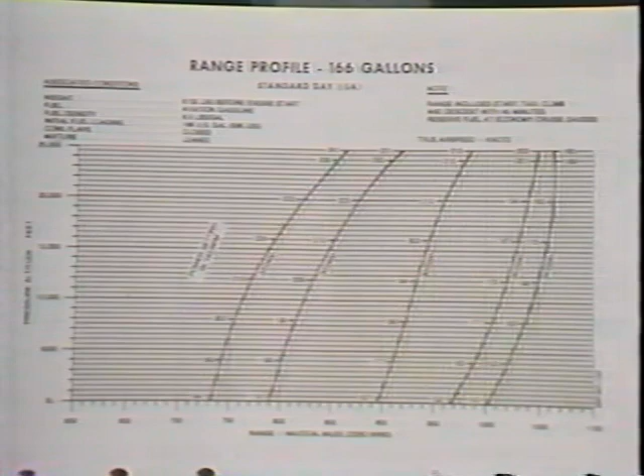Although they seldom mention the lift-to-drag numbers, the charts are based on calculations from the lift-to-drag ratios. There are a couple of other figures which you can obtain from a chart of drag curves.

A plane's range and endurance are not the same. By slowing the airspeed further, you can keep the plane in the air longer.

A rule of thumb might be, if you know the maximum range and maximum gliding range airspeeds of your plane, you can calculate 75% of that figure. You now have the maximum endurance speed. It's pretty slow, but it will keep you in the air longer, if time is more important than distance.

No one is going to give you a medal for the most turns made in a holding pattern. The maximum endurance airspeed is at a point where induced drag is creating 75% of the total drag. Keep in mind that it is really a specific angle of attack rather than an airspeed, but for lack of anything better, we must go with airspeed.

One more thing about the airspeed for maximum endurance: it is also the airspeed which will give you the least power-off sink rate. So, for that forced landing due to engine trouble, if your chosen field is under you, you may want the slower speed to give more time for communications and setting the plane up for landing. Certainly, you would want to consider minimum sink on a night forced landing.

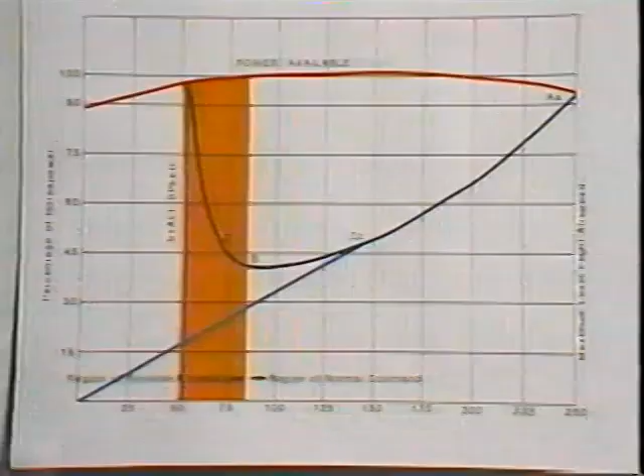The graph I refer to is the power required curve, which includes information on the flight in the region of reverse command. At first glance, you will see that the power required curve resembles the curve for total drag. That is only natural, since thrust must equal drag in order to maintain a given airspeed.

However, thrust and power are not quite synonymous. Power is the work turned out by the engine, which it transmits to the propeller, which in turn converts the energy to thrust. In the process, there is some loss of energy, especially at the extremes of airspeed. This is indicated by the power available curve near the top of the chart.

The horizontal lines represent percent of brake horsepower, and the vertical lines represent indicated airspeed. The curve begins on the left at the stall speed and ends on the right at the end of the power available line. To the right of the vertical line, through point D, is the region of normal command, or what we call the front side of the power curve.

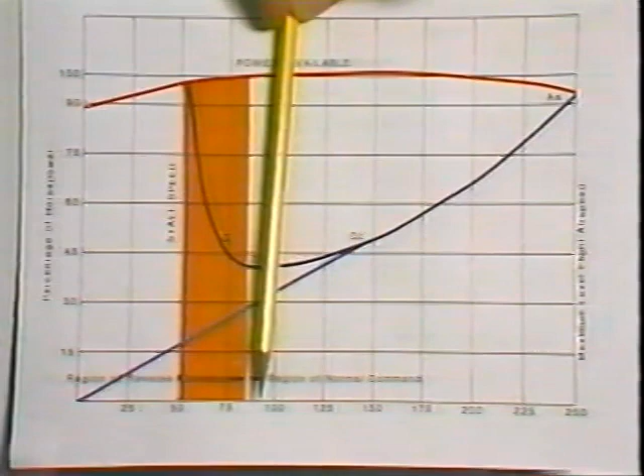To the left of the vertical line is the region of reverse command, or the back side of the power curve. Consider point D first.

It is located at the lowest point of the curve where the power requirement and consequently fuel consumption are at a minimum. This point represents the requirements for maximum endurance and minimum sink glide. At this point, any change in the angle of attack will produce a loss of altitude if power is constant.

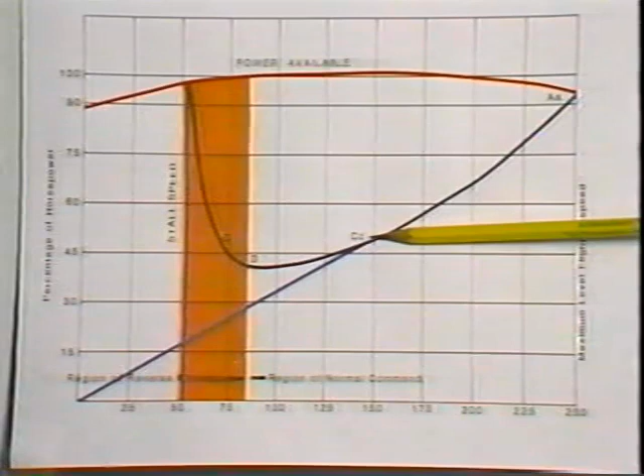Point CC is located at the place where a line from the origin of the graph touches the curve as a tangent. This represents the maximum range and maximum gliding range requirements. The significance of this location is that there is a large increase in airspeed at only a slight increase in the power required.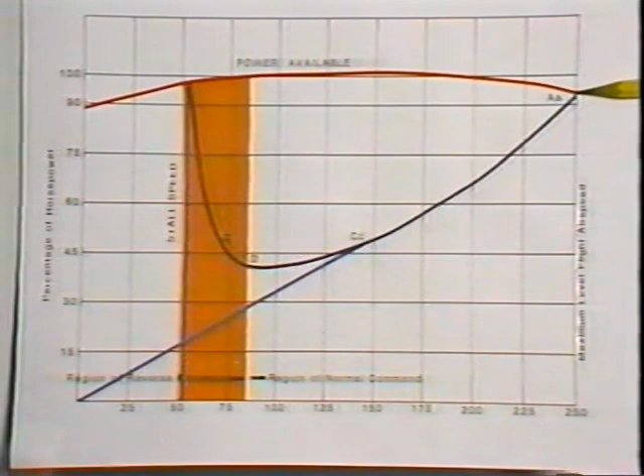At point AA, the pilot is using full power available to maintain maximum level flight airspeed. As at point D, any change in angle of attack will cause a loss in altitude. There is no more power to compensate for a higher angle of attack, so the plane will descend. Lowering the angle of attack will give you increased airspeed, but it will come at the expense of altitude.

At any point on the front side of the curve, an increased angle of attack will slow the aircraft and it will climb. A decreased angle of attack will increase speed and cause a loss of altitude. This is what you expect as you fly, and this is why it's called the region of normal command.

You will note that for every power setting necessary to maintain a given airspeed on the front side of the power curve, there is an identical power setting required to maintain a much lower airspeed on the back side of the power curve. It is a fact that while in the region of reverse command, the slower you fly, the more power it takes to maintain altitude.

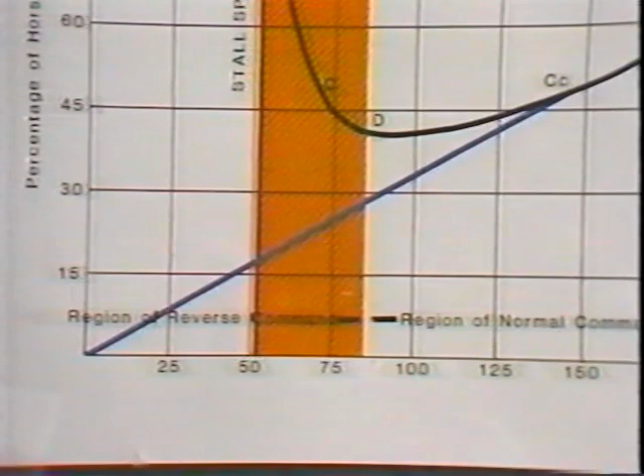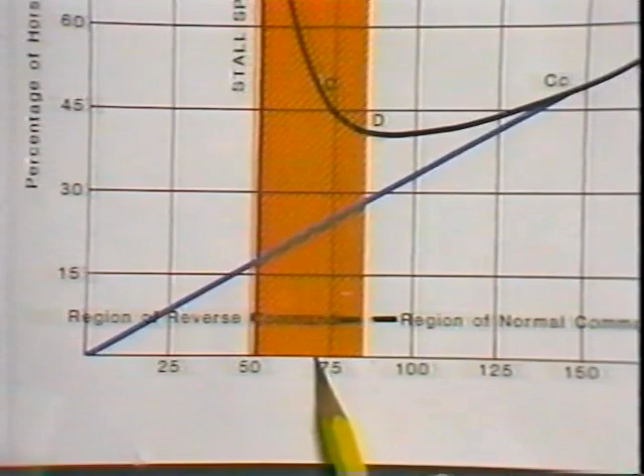This is due to the power of induced drag while the wing is at high angles of attack. Let us assume that the airplane at point C is on a long, power-on final in a busy traffic pattern at an airport with training activities. His airspeed is 73, and he is using 50% of power. Any nudge from his current angle of attack will produce results reversed from normal.

Let's suppose this pilot lets the nose drop a little due to some gustiness close to the ground. The airspeed will pick up, but the aircraft's inherent stability will not automatically correct for the extra speed. Unless the throttle is retarded, the plane will momentarily retain the additional airspeed and will climb. Climb with the nose down? That is correct. Remember, we are now in the region of reverse command.

Now, let's try to put it another way. The nose of the plane at C pops up a bit. The airspeed slows a bit, and the plane begins to sink. The pilot raises the nose a little more and adds some power to regain his approach speed of 73. At this point, 73 is no longer enough. The increased angle of attack has added a large amount of induced drag, which is acting just like a drag chute. The only cure at this point is a lot of power and a lower angle of attack.

If the pilot continues to maintain his approach by increasing his nose-high attitude, he will probably mush into the ground short of the runway. It could even happen with the throttle wide open under certain circumstances. Pilots don't get in trouble with the region of reverse command at cruising altitudes because it only occurs at the slower speeds, and these problems are usually on takeoff or landing.

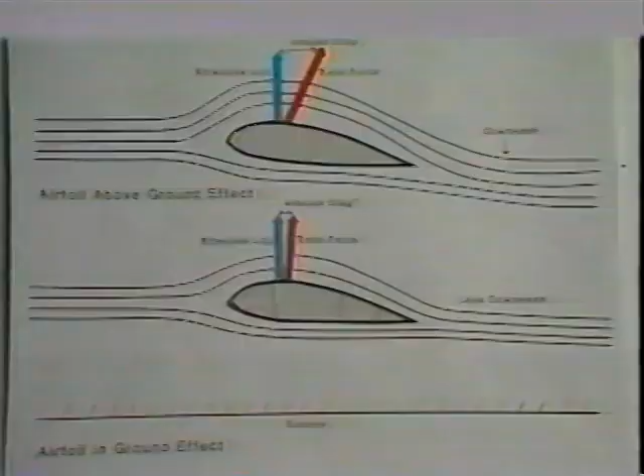We discussed previously how upwash, downwash, and vortices form around a wing in motion. You know from that discussion that a portion of the lifting force produced by the wing is directed aft and is referred to as induced drag. As the angle of attack and coefficient of lift increase, so does the induced drag. Induced drag is at its greatest when your plane is slow at a high angle of attack.

Suppose that we could eliminate some of the vertical velocities which develop ahead and behind the wing. This would lower the average relative wind and place the chord a little more parallel to the ground. If we could do this, the aft component of lift force, which we call induced drag, would not be as great, but instead would produce a slight increase in the effective lift. That is precisely what ground effect does.

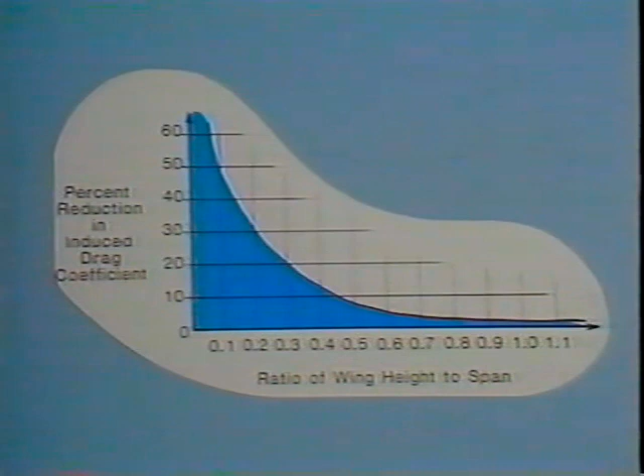If there is no cushion of air, how does this happen? The vertical movement of air around a wing disturbs the air at considerable distance from the wing surface. The vertical distance from this disturbance is roughly the span of the wing. Suppose that your plane has a span of 36 feet, and that you're flying that plane 36 feet above the ground. The downwash should have some effect on the blades of grass below you.

By descending even further, something has to happen to the downwash. It flattens out because it has no place else to go. The closer to the ground you fly, the more restricted are the vertical velocities behind the wing. At wingspan height, you will lose about 2% of the induced drag. At half the wingspan, you have eliminated about 8% of the induced drag. And when you get down to a quarter of the span, you will have eliminated nearly a quarter of the drag.

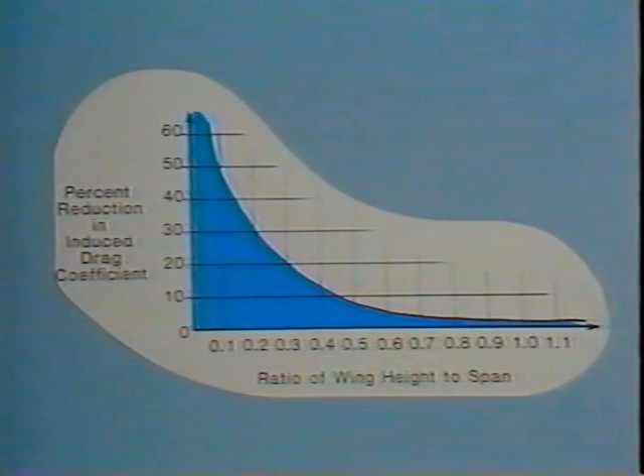At touchdown, you will have gotten rid of as much as half of the induced drag. Parasite drag, of course, is hardly a factor at speeds we are talking about.

All aircraft encounter ground effect, but it is obvious that the effects will be a little greater on low wing types. However, the difference in location of wings doesn't have a large effect, and the suggestions we have for flying in and out are similar for all types.

We all can remember those student landings when you had everything set up and ready for the flare. Then suddenly the plane ballooned up, the nose pitched down, and you floated and floated. You probably had a little excess speed when you entered the ground effect. With less drag to slow us down, we used most of the runway. No touch and go on that one.

If you had a good instructor, he would have taken the time during the taxi back to explain why you had used so much runway.

I haven't mentioned the tendency for the nose to pitch down in our earlier explanation of ground effect. Planes are designed to be slightly nose-heavy. The downwash affecting the horizontal stabilizer is used to counteract this nose-down pitch. The purpose of this is for stability, which will be discussed more fully in another presentation in this series. We know then that it is necessary for the horizontal stabilizer to have the downwash in order for it to be effective. In ground effect, the downwash is diminished, allowing the nose to pitch down.

This means that upon entering ground effect, you will have to use more elevator. A full stall landing will take considerably more elevator than a normal power-off stall at any altitude.